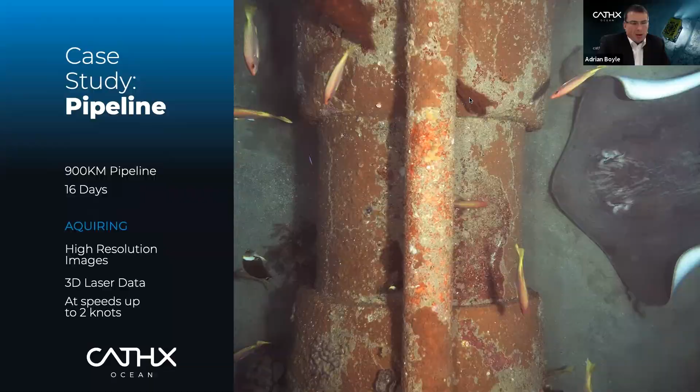And just for me to close out, what we're talking about is essentially CATHX FDI. Really what we're saying is that we acquire much better data. We acquire very, very quickly. That facilitates processing of that data to get to decisions much faster. While we offer the services today, what we're really doing in parallel is building the data infrastructure, the data services to effectively future-proof this technology so that it operates with uncrewed and autonomous vessels.

And our vision for FDI is ultimately that we will facilitate the collection of large-scale visual information in the ocean so that we can actually get much more information in the first place and monitor change much better. So with that, I'm going to hand over to Richie to present on what our FDI service is today in a little bit more detail. And then following that, David will talk you through particularly the technologies that we're using with a view to uncrewed and autonomous operations in the future.

Thank you. Thanks, Adrian. My name is Richard Close. I am the Chief Operations Officer for Cathx Ocean. And what I want to do today is to talk about the services that we offer currently within the Cathx Ocean company.

So Cathx Ocean offers fast digital inspection to any clients who wish to use the system, especially clients who would rather use their operational budgets, their OPEX budgets over their CAPEX budgets, which makes it a lower cost of entry into fast digital inspection deliverables. Every FDI solution that we develop for a client is tailored based on the client's actual data requirements, what they need at the end of the day. And it also takes into account the assets to be surveyed, the vessel and the vehicle features also.

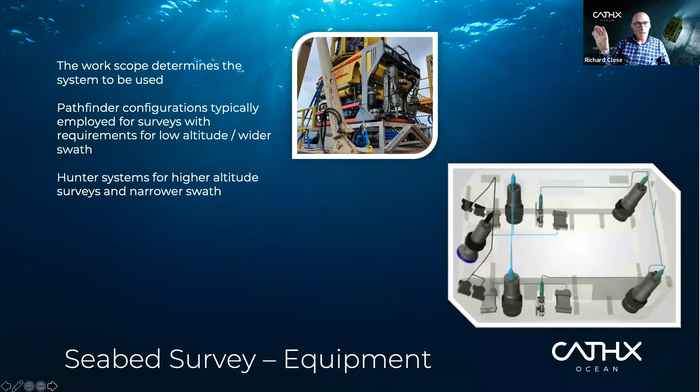The Pathfinder solutions typically are used where you have a need to fly quite low to the survey area. You may have other sensors on board that need to be a little closer to the target, but you still require a wide swath of seabed to be surveyed as quickly as possible. The Pathfinder and Hunter systems can give you options there: a Pathfinder can get you wide swath at low altitudes, whereas a Hunter system can be used to acquire data at higher altitudes if you need a narrower swath.

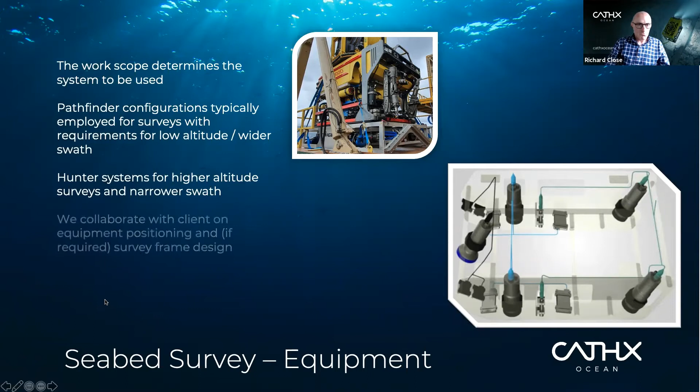So we collaborate with our clients on the equipment positioning as well. As you can see in some of our shots here, we work very closely during the integration phase onto the vehicle itself as to where each item of our equipment gets placed. We will also work with the client to help design any survey frames that may be needed. If there's not one available already, we're more than happy to get involved and give feedback on any potential frame designs.

The systems themselves are quite portable. Even the largest of our systems is 3 pelican cases, and one of those is actually our rack-mounted server system and NAS system. We also provide any IT hardware that's needed on the vessel itself - servers, PCs, laptops, and primary storage as well. That primary storage solution can then also be hooked up to any vessel IT systems too. If there's a data backup solution on the vessel, we can also integrate into that as well.

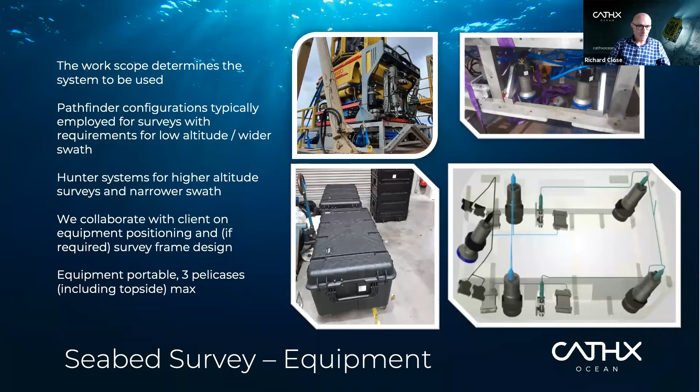So let's just talk a little bit more about some of our other equipment. We have developed a new product that's currently gone out of test now at this stage - it's traveling to the Gulf of Mexico, and it's the Cathx Vanguard system. This is developed mainly to work with clients who have smaller vehicles or require faster deployable solutions and simpler to operate solutions as well. I'll explain a bit more about some of those requirements in a little bit. But essentially, we have a very compact system which will still acquire the same data sets that we had before, with the added advantage that there's no calibration required.

The system is a fixed unit with 2 imaging systems which can acquire images, and one can acquire video. We also have a laser emitter with a laser camera in there also. So we have a lot of sensors within a small space of less than 1 meter in length.

Very easy setup and operation. We essentially have 2 external cables into the solution coming for power and comms, and then we also have 1 or 2 cables leaving the system to our light panels as well. So it's a much simpler setup from a user perspective on the boat - you can quickly mobilize this onto a vehicle.

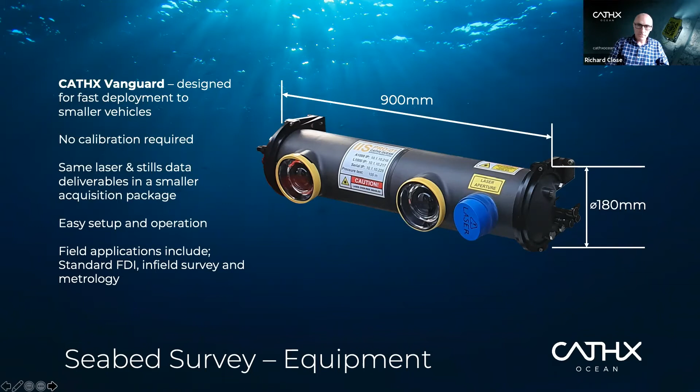So in terms of the data that we can process, the systems themselves are designed to acquire a range of raw data sets. This could be UHD or HD images, UHD being 4096 by 2304 image size, or HD images. We can also acquire laser data from our laser systems, starting at a minimum of 30 Hertz. But that's just the ingredients for our final data deliverables typically.

And what we can do with that, and with some processed navigation data, is start to generate GIS type deliverables. We can generate geopositioned images and use world files with those. We can also create ortho-rectified images, and standard point clouds colored by depth or intensity. When we merge our data sets together, we start to generate additional value, using as an example a color point cloud, which I'll talk about in more detail shortly.

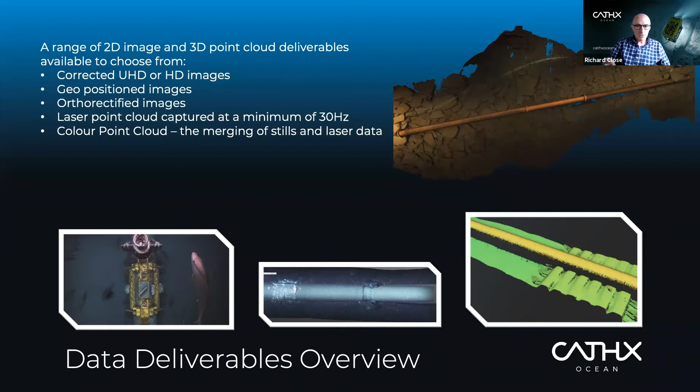So to give you some examples of the types of images we can acquire - this is a pretty standard type of image we get when we're out on a survey, certainly in the Southern Hemisphere. But what makes this unique, and what I can draw your attention to, is the focus. Our camera systems continually adjust focus based on range to target, and that information is fed in from external systems, constantly monitoring that focus range and adjusting our lens to keep the images sharp.

There's no motion blur in this image either, despite the vehicle moving. Your shark is twitching as well - they're about to bite into a fish you don't see yet further up. And that's because we have very short exposure times.

We've managed to achieve that by using our Aphos 32 lighting systems to illuminate the whole area, allowing us to have a very short exposure time. Short exposure times mean we're not getting any movement during the time the sensor is exposed. We also have a large depth of field within our camera system, so should the vehicle suddenly increase or decrease elevation quickly, we won't see that impacting our focus or our ability to stay in focus. So we have this consistent high quality sequence of images you can see here.

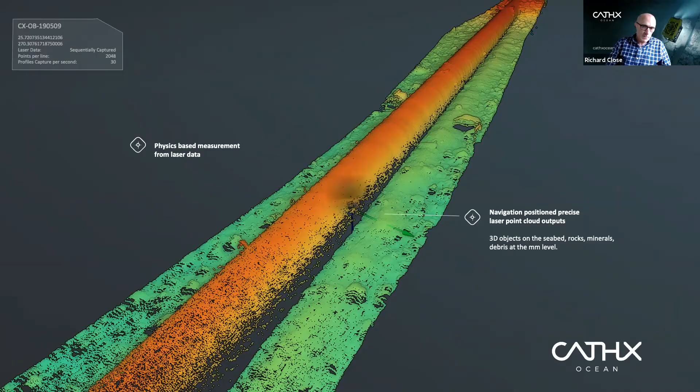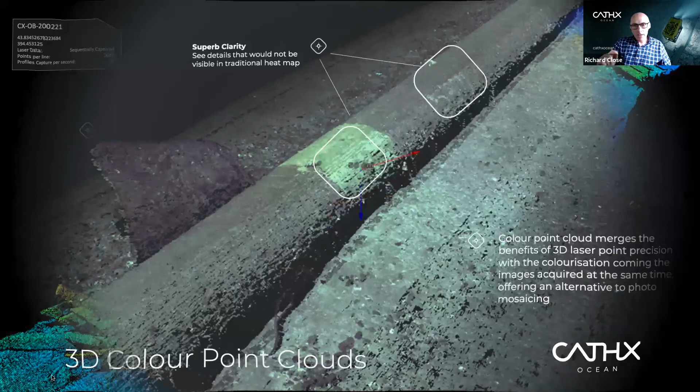And then just to mention, I had mentioned the color point cloud - this is an additional data deliverable we can offer, designed to address some of the issues when it comes to mosaicing large tracts of images and photos. Essentially, as you create longer and longer mosaics, any errors or deviations in the feature matching continue, and the error rate increases the further down the mosaicing pipeline you go.

So in order to overcome that, and to offer what we feel is a data set with more advantages, we combine our laser and stills data. What we do here is take our laser data, and for every point on a given laser line, we reference the image that was acquired at the same time - the co-registered image - pick the color from that point in the image, and place that color within the point cloud point.

This can be viewed as an RGB view within your point cloud viewer. This gives you the precision of the laser data, so you're not having to deal with feature matching or any kind of object detection. But at the same time, it gives you cues you don't realize you see from coloring the point clouds, which is only visible within the images. For example, if you have any writing or markings on the structure, you won't see that within the point cloud structure itself, but when we color it, you see those markings.

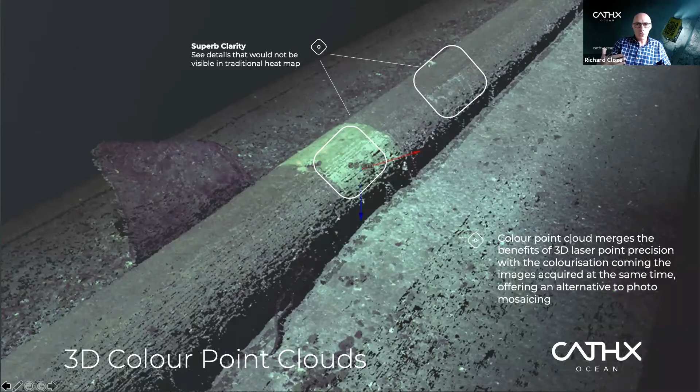As I mentioned earlier, our equipment has multiple applications. We can travel out and inspect an export pipeline. We can take the same system and, in the future, look at structures, and then go infield and perform metrologies as well.

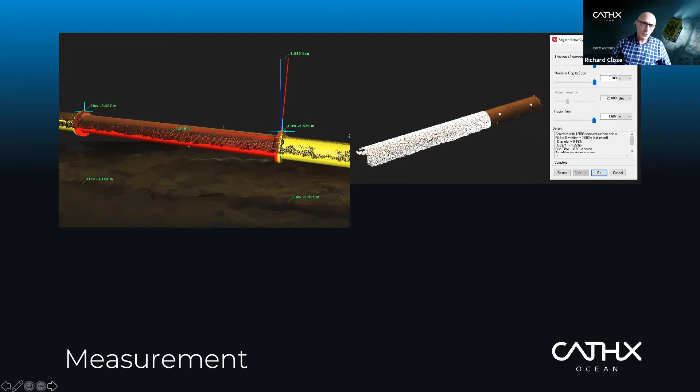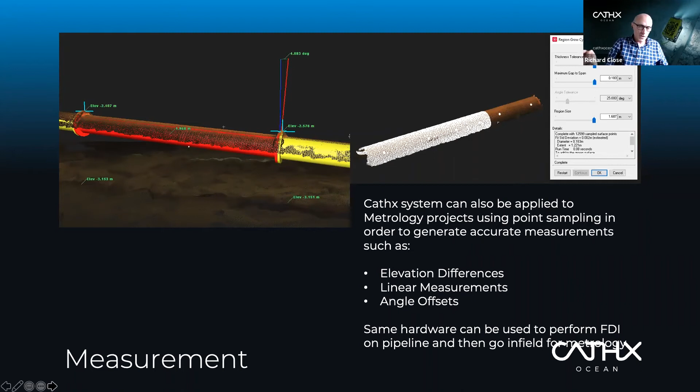With our systems right now, we have the ability to perform spool metrologies by running over the solution. This is still a fast digital inspection—there's no stopping, landing the vehicle, grabbing data. We are just traveling over the area to be measured, and from that data we can provide reports on elevation differences, linear measurements, and angle offsets. Again, it's the same hardware that can do all these different applications.

One important point: despite all the technology and data deliverables I've talked about, a lot of this is still driven by people currently. Dave will have other ideas when he speaks shortly, but right now we have a team of very skilled engineers who can travel out and work on site, whether during the integration phase or the data acquisition phase, to ensure the best data is acquired.

Where travel is limited, as it is right now—very restricted, or impossible—or even to the point where there's no person on board, such as with an unmanned surface vessel, we will provide training and an entire support package. This can include hands-on training for on-site technicians during integration and test, real-time support using whatever local hours are needed, provided over phone, web conference, radio, or other medium that works for our clients. We can also have remote access to our systems, providing we have a suitable connection, allowing us to control the systems if needed.

It's important to note we have a lot of automation built into our camera systems themselves, so there's no need to be constantly adjusting focus, exposure times, aperture settings, or virtually any other settings. The cameras work primarily by analyzing data acquired in the previous fraction of a second and make adjustments off the back of that, constantly ensuring we're hitting a certain window of quality in the data being acquired. So there is limited hands-on control needed there.

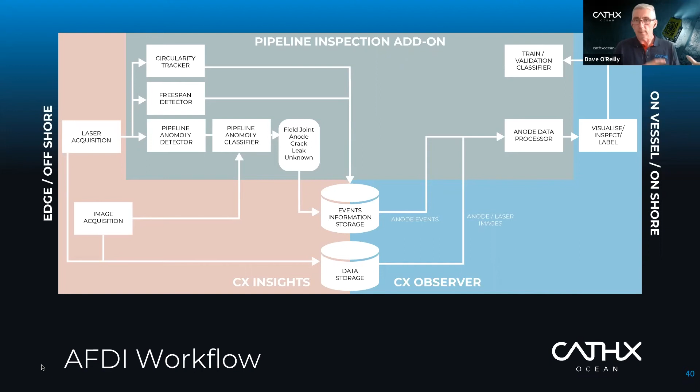But we also have the ability to identify that there is an anomaly in the laser profile, and that we might want to pull in a white light image to inspect it further. But for the purposes of today, we'll just focus on the free span detection. What I wanted to highlight in this slide was that CX Insights and CX Observer are available for all applications. They're standard microservices available for all applications.

If we move to a different application, and I'm just going to pick another one here, which is mine detection, we'll simply take out the pipeline-specific microservices and put in mine detection microservices. And in the same way, we'll use the laser to identify where there might be areas of interest, and we'll pull in images to do further inspection on those. What that does is allow us to focus our attention at the visualization and inspection stage.

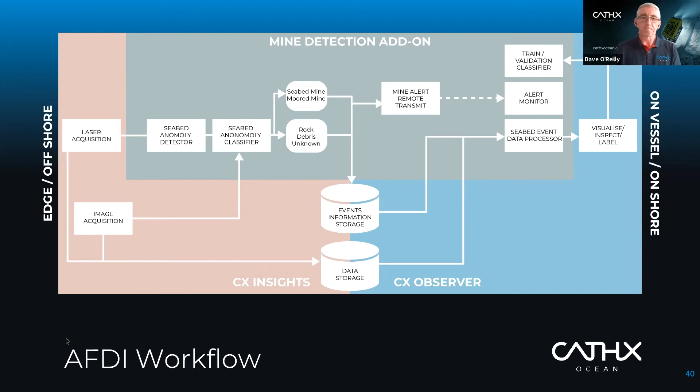So this is where we're at today. We have traditional acquisition of data, we pre-process it, and we produce data products. People familiar with our products will recognize some of the data products that Richie mentioned earlier, like 3D point clouds and 2D rectified images. Where we're moving to right now is the introduction of CX Observer, and that allows us to do visualization and inspection on that data, but also to tag the data. In the process of tagging that data, it allows us to manually classify the data into data sets that we can then use for training an automated classifier. And that's where we're going to be moving to in future developments.

So what that'll allow us to do is, in an offline process, using CX Observer, tag the data, generate data sets for training, generate an automated classifier, which we can then plug into CX Insights as a new microservice and do it at the edge at the time of data acquisition. That allows us to take a process where we might require a human to do the inspection and the tagging, and move it as an automated microservice into the automated workflow in CX Insights on the vessel that's acquiring the data.

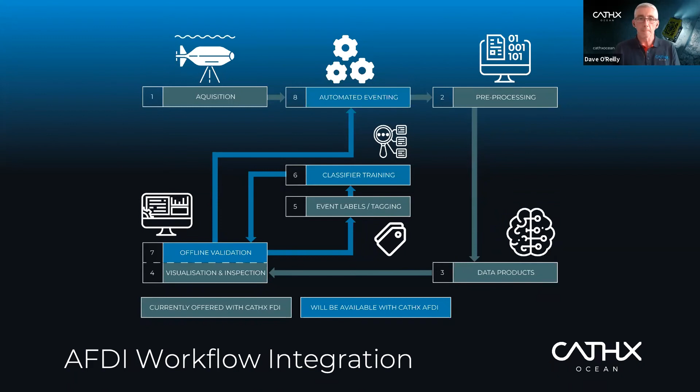So moving on, I said we'd just focus on the free span estimation here for this particular slide deck. This is just an example of where we use a couple of microservices to do this free span detection. The first microservice we use is what we call pipe tracker. As Richie mentioned earlier, we capture laser at 30-plus hertz. In each of those laser profiles, it identifies where the pipe is and where the seabed is. And by doing that segmentation between pipeline and seabed, it allows us to dive further into that data and start to understand it a bit better. So now we have an awareness of the scene that we're looking at.

And in this particular application, free span, what it allows us to do is calculate that separation of the bottom of the pipe from where the seabed is. And it allows us to raise alerts on where we have identified free span. So that's the separation of the pipeline from the seabed. So what does that do for us?

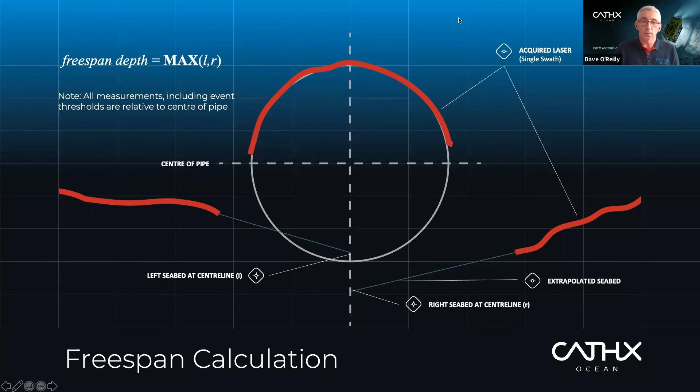That first of all allows us to, in real time, as the data is being collected, this particular application is for an AUV, but these screenshots here show where it could be used for an ROV, maybe in a pipeline application. It allows the user to monitor that separation of pipe and seabed and raise alerts at the time that the data is being collected. So there's no need for the storage of the raw data, processing and then visualizing it afterwards. So it can all be done in real time.

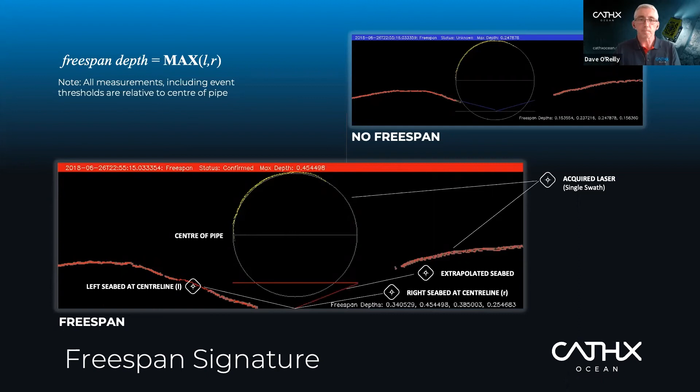So moving on then, just to recap where we see the benefits of this are. So by enabling the automation of data extraction from the scene, what that does is it allows the customer to make decisions faster, much earlier in the data acquisition and processing workflow. It allows us to highlight areas of interest such that we no longer need to process all of the data straight away. It's still available to be processed if that's what is required. But what we can do is we can prioritize the processing of the data in the areas of interest. For example, in this case, where there may have been free spans.

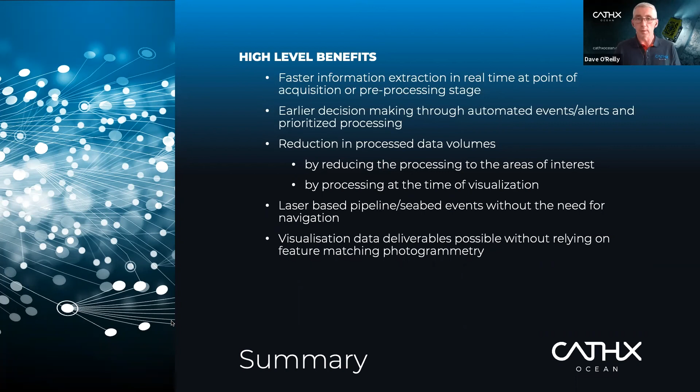So we have CX Insights working on the vehicle, either the submersible vehicle or on the surface vehicle. And obviously the bandwidth back to the onshore facility can be quite limited. So because we're processing and extracting the areas of interest at the edge, we can minimize the amount of data that's passed back to shore, and therefore be able to do a lot more in real time remotely.

So I think that's the last slide that I have. I think, Adrian, did you want to take this one?

So just to kind of round off the session from our presentation point of view, I hope everybody's a little bit clearer on what FDI is. As I mentioned, we're talking particularly about the seabed here and downward facing systems. Where Cathx is going with this is FDI is essentially a service that we offer today, but we're investing heavily into real-time automation so that we can not just acquire data, but process data as it's acquired. And that means processing it on the underwater vehicle and on the uncrewed vehicle.